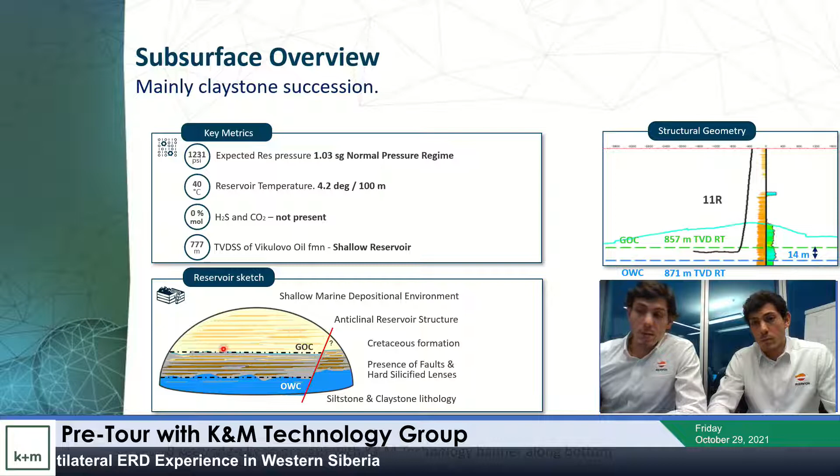On the bottom of the slide, it's good to share this simplistic sketch of the reservoir, which gives some understanding of the reasons behind designing such wells, the extended reach type. The reservoir particularity is having the oil contained in so-called sand lenses, which are distributed within the main claystone massive.

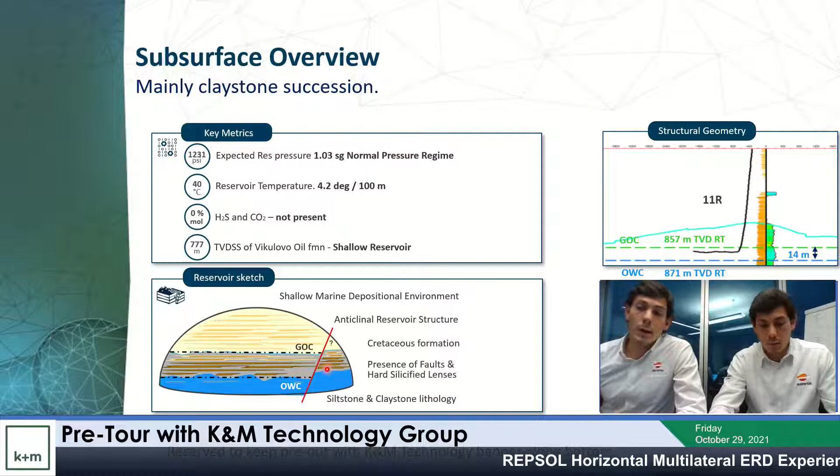That basically creates the main idea and objective of increasing reservoir exposure. We've approached that by drilling more meterage, having more horizontal interaction of the well, and increasing the drainage area.

Expanding more on the subsurface part, we share the geomechanical overview. Here we can see two basic features. On the left-hand side, the aerial view of stress distribution. The prevailing stress regime is a normal stress regime with a dominant vertical stress. For the horizontal stresses, we have negligible anisotropy, meaning our horizontal stresses are more or less equal in all directions. That's also specific to the geological environment.

On the right-hand side, we can see the wellbore stability plot. We have the equivalent mud weight plotted on the horizontal axis, and the vertical and measured depths plotted on the vertical axis. So here we're looking at the depth interval of the vertical parts of the well, and the highlight of this graph is how that claystone succession is prone to collapse and instability.

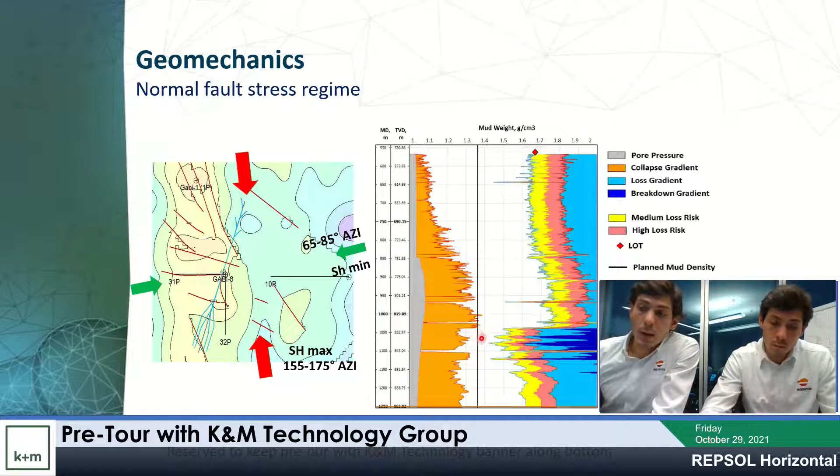And we have an appreciation, right? It all makes the drilling window quite narrow for operating, and in the tightest place we have just 1 ppg drilling window margin, which is quite interesting, and we'll share how we approached and dealt with that.

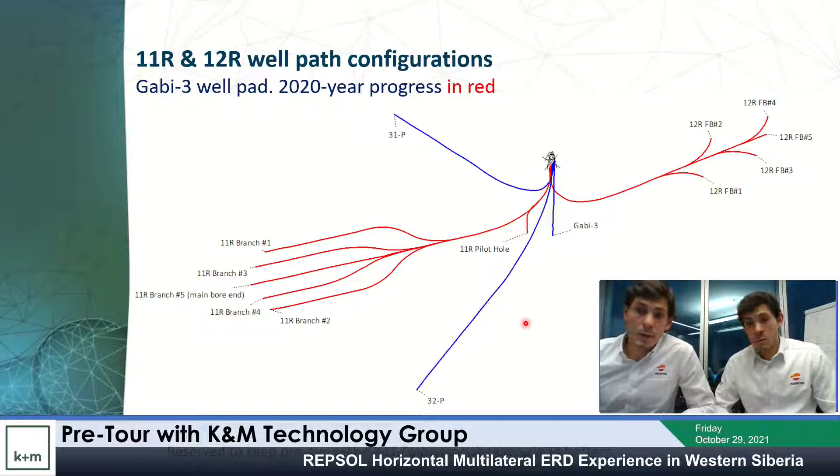Moving on to the next slide, we want to show you a good picture that gives you a well pad overview. These are highlighted in red, 2 wells drilled during the 2020 year campaign, by names 11R and 12R. 11R was the first one, and they're similar wells, but having different configuration of well trajectory in the horizontal plane, as we can see.

The 11R, having the more complex trajectory, has more reservoir exposure and more extended laterals, whereas the 12R, the second well, has less reservoir exposure. We'll look at the figures further on, it has more of a fishbone type configuration. They were both drilled in opposite directions, intentionally designed from the reservoir engineering perspective to test different patterns of reservoir performance, and also to avoid further well test interference.

Erik, I have a question, please.

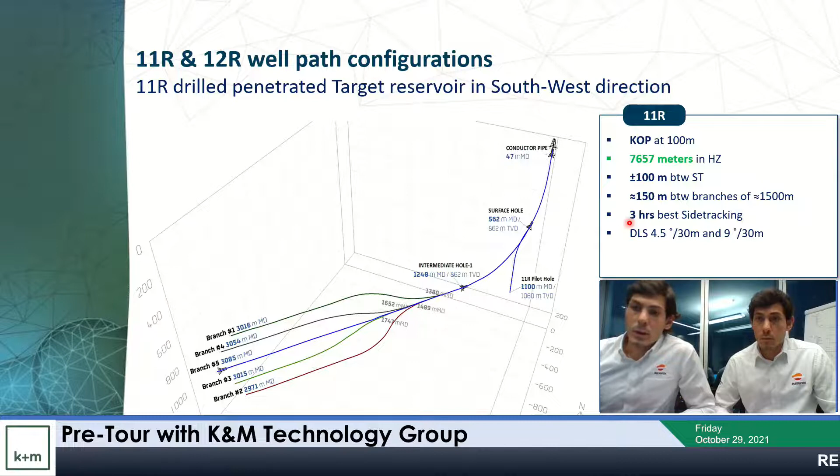Can you please elaborate a little bit more as to what was the logic behind the different length of those laterals, of those branches?

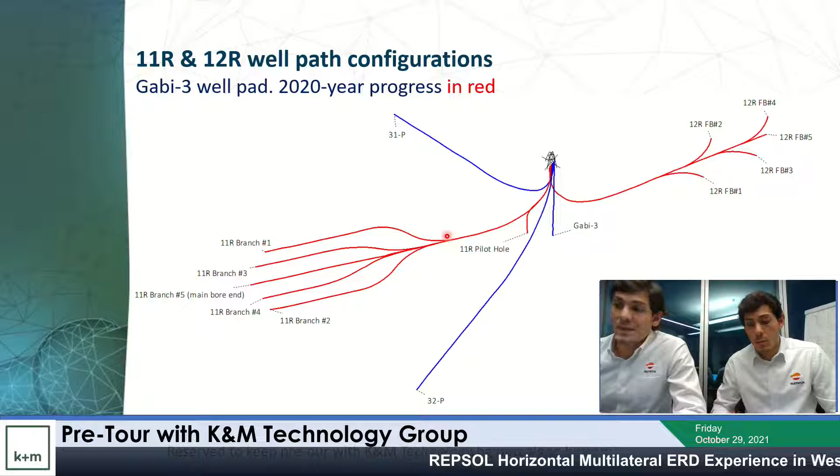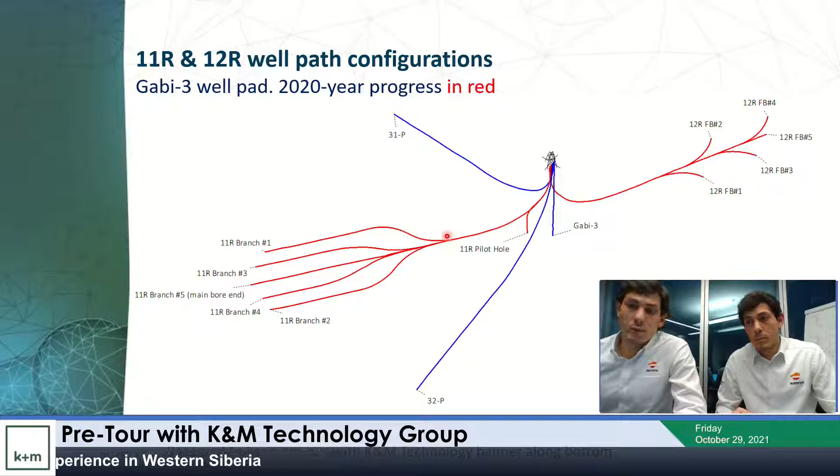Yes, of course. That's also coming from the project appraisal objectives. We were trying to estimate the reservoir potential, and we also wanted to understand which performance would be delivered by the different horizontal configurations of the wells. Reservoir properties are not equally distributed around the reservoir, and the main idea was to see and understand if increased reservoir exposure and horizontal meterage would really bring us any good benefit in terms of production output.

Yeah, if you would see any very beneficial and significant associated increase in production. And actually, it did.

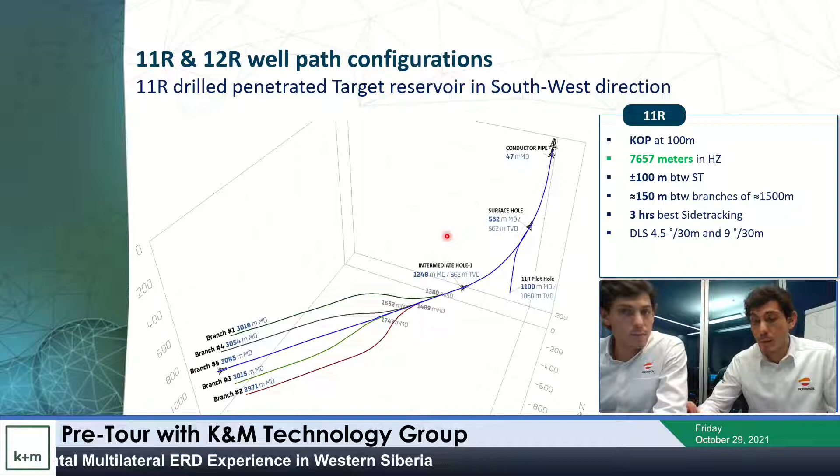We confirmed that the bigger reservoir exposure, the 11R well with the highest drainage area, was producing accordingly more than the 12R well - by a big order, even larger production output.

To give you more exact numbers of the reservoir exposure, here we have the key metrics presented in the slide. That's the 11R well, and it has achieved 7,657 meters of horizontal cumulative length of all the branches together. Also interesting to highlight here that the kickoff point is at a critical shallow depth of 100 meters.

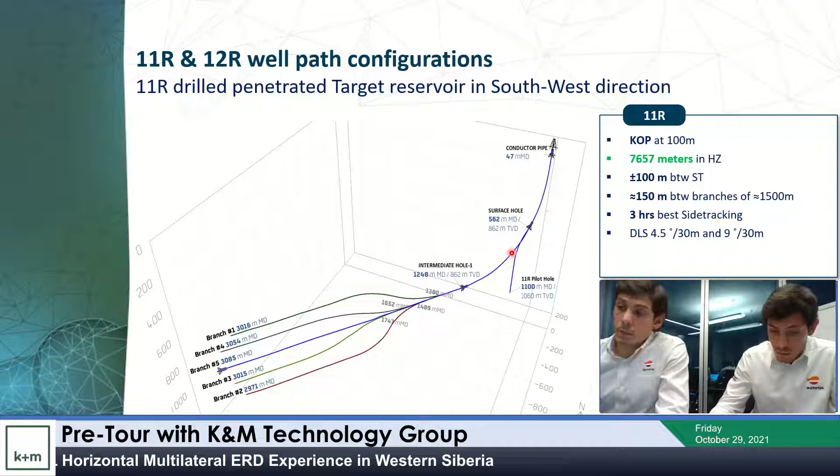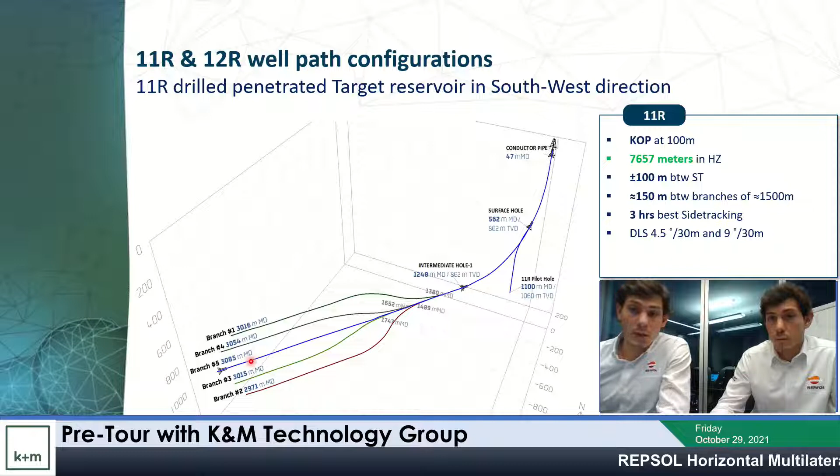Because we had to initiate the directional work as early as possible, following geological reasons. Another point to mention here is the sequence of branches. The configuration was executed by drilling branch number 1 first, and as you can see in the label order, finishing with branch number 5, which is effectively the main bore, and which was cased with a 4.5-inch liner screen, while all the rest of the branches remained open, not cased, not isolated. That was the completion strategy, which we will also touch on in more detail further on in the presentation.

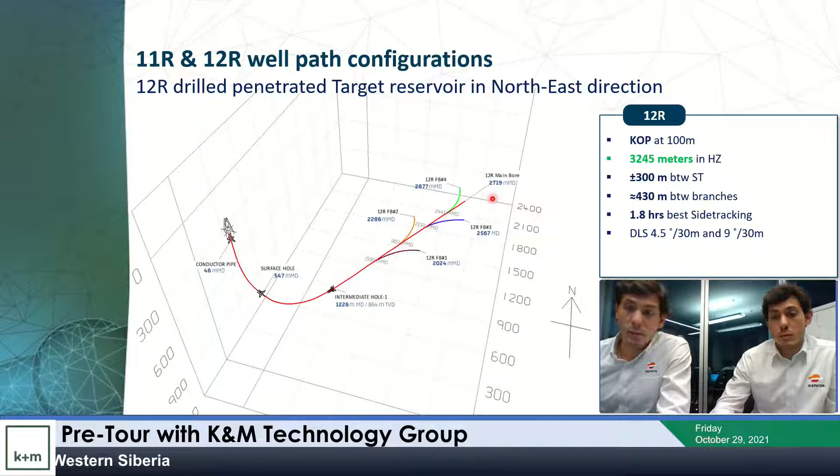On this note, just to show the second well trajectory - more of a fishbone type configuration, a simpler one, having just 3,245 meters in horizontal exposure. The distances between sidetrack points for each lateral are also bigger here. As Artur confirmed, that type of well did not prove to be the best case for the project, with having the largest exposure being the best solution.

Yeah. Can you please go back?

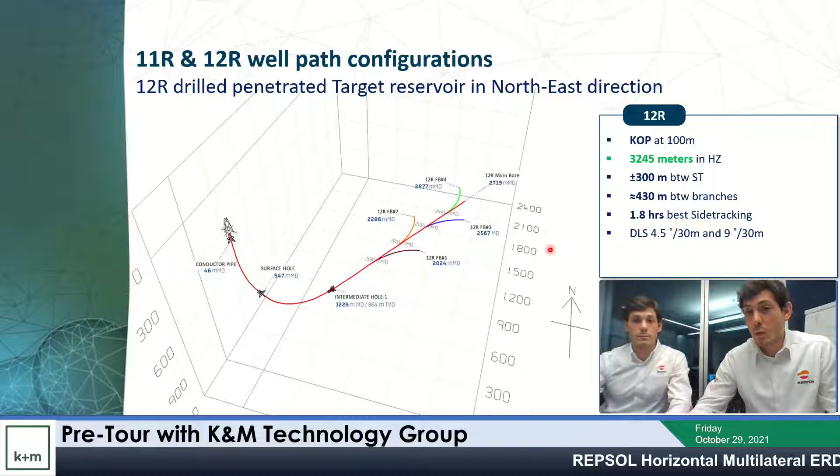Sure, another thing worth mentioning here is that both these two wells were built in two opposite directions. In terms of geomechanics, as was already mentioned, our horizontal stresses are more or less equal in their absolute magnitudes and values, and this was actually confirmed by drilling conditions - they were almost identical. So there is basically no matter in which direction you drill in our reservoirs, in our area, the drilling conditions are the same, and the behavior and all the problems associated are equal.

Moving on, it was also interesting during preparation of that presentation to give everyone an understanding, and basically the confirmation from our side, of where our wells fall in terms of categorization of that complexity of the trajectory.

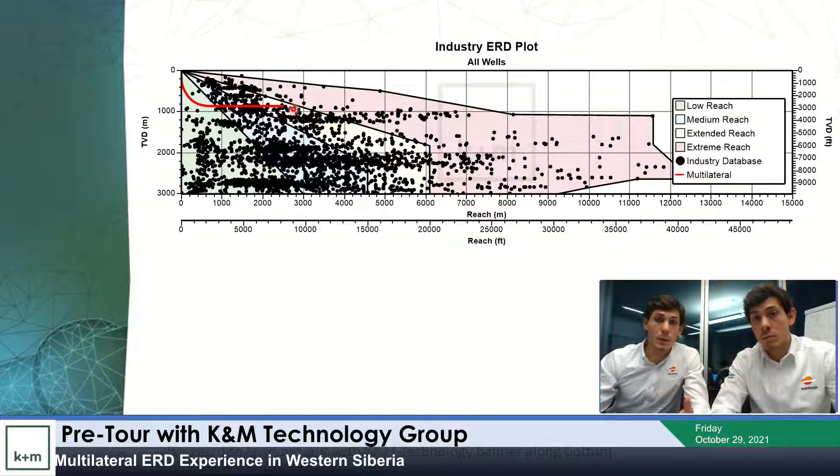And here we plot in red our wells over the industry-based benchmarking of all extended reach wells, also called the dog nose plot. And here we see, according to this categorization, that this type of well falls closely to the border between extended reach and even extreme reach categories.

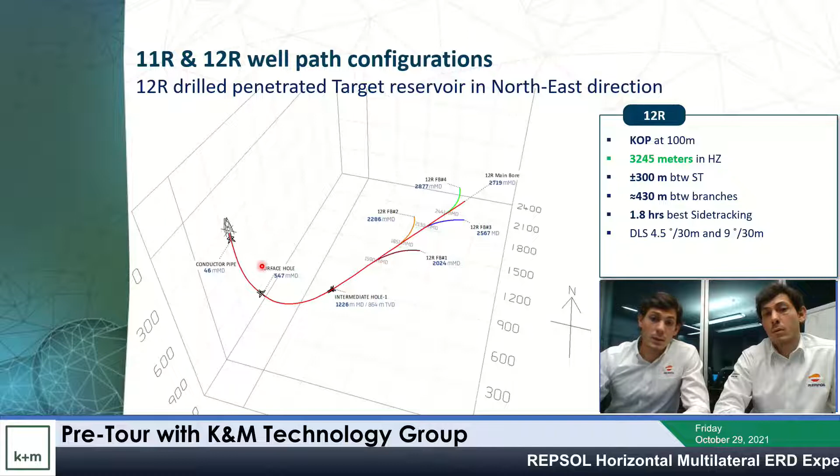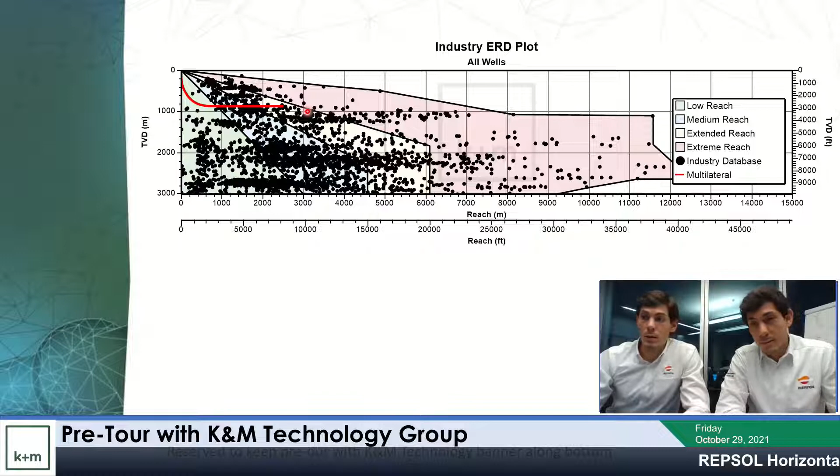From the previous pictures, it was not really - looking at that, it does look quite simple from the first glance. But when we look at the comparison between other extended reach wells, this shallow environment is exactly why it brings this whole complexity, making the project not standard, not simple, but quite interesting. It might look even more interesting if you sum up and take into consideration the whole reservoir footage that we drilled - 7,657 meters, which will basically place us even further on the spot.

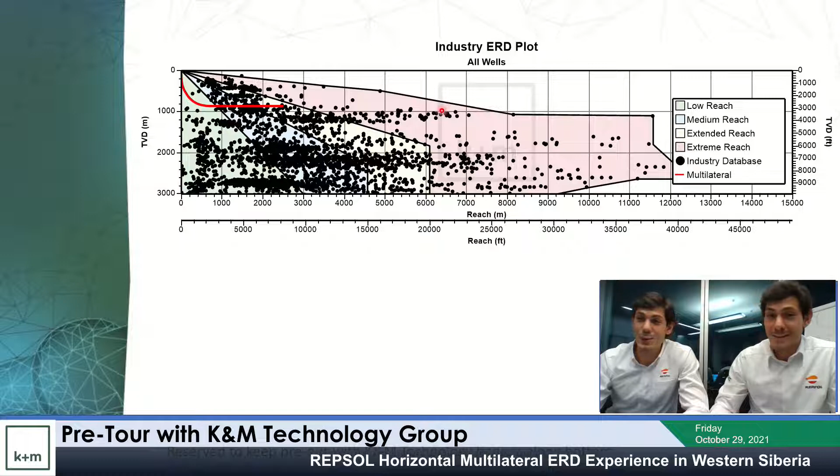Somewhere here, close to seven. If we count it like this, this would be looking like a record for this TVD. It might be, but here we just presented the main bore. If you're talking about summing up all the branches, it would look like a really extreme case. That's a good try, guys, but that's not how it works - try to beat all that performance. But it's still an interesting project that we want to move on sharing with you guys.

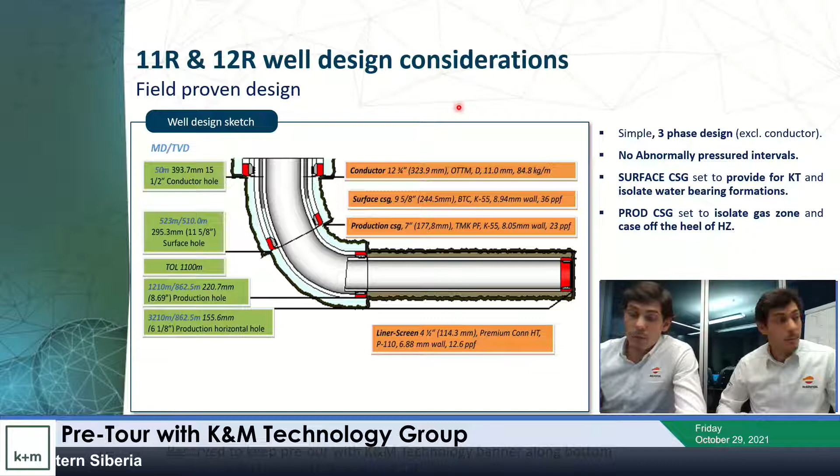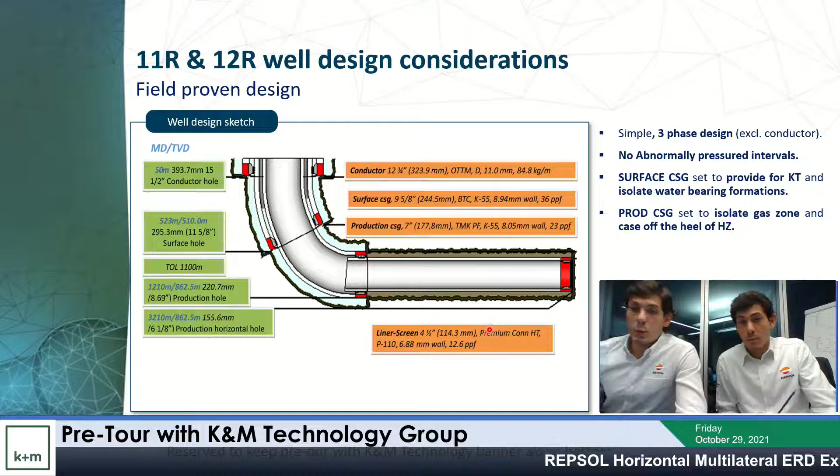And the next point to stop would be the well design. Just to quickly go through - from this side, there is nothing sophisticated. We're having the standard casing sizes and basically quite typical for West Siberia casing design configuration, which is a three-phase design, not counting conductor: 12.75, 9 5/8, and 7-inch casing sizes, and a 4.5-inch liner screen, which was installed in the main bore and located in the way where the screens were in front of the most productive potential intervals, so to say.

Right. At this point I'll hand the word to Artur to continue. Thanks, Erik. After this introduction, we'll go to engineering details.

The first topic will be hydraulics. We'd like to start with an issue, a challenge that we experienced at one of our offset wells drilled prior to this appraisal campaign. That was a horizontal well with a 2 kilometer length horizontal section, drilled with oil-based mud, the first such a long well in the field.

What we can see at the first plot, to the left, is the ECD plot on the vertical axis, showing length in TVD and measured depth, both in meters. At the main part of the plot we have our drilling window: wellbore collapse gradients to the left, static density in green line, and circulating densities in red line with the fluid loss gradient shown as the blue zone.

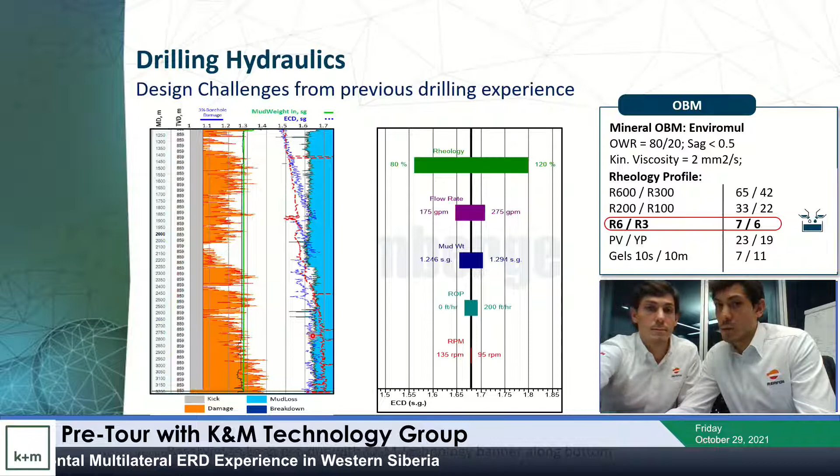The most important thing to mention is that the most typical issue for such shallow ERD horizontal wells is ECD management. We experienced exactly this issue, and in a hard way.

By the very end of the section, our static density was even less than the wellbore collapse gradient, so we experienced hole instabilities and cavings were observed at surface. Our ECD with pumps on was exceeding the fluid loss gradient, so we experienced seepage losses.

We were losing quite heavily the expensive oil-based mud, and the main driver and contributing factor to this issue was the rheology of the fluid, which gave us such a high ECD.

In order to tackle this, we could only implement additional drilling practices, additional back reamings and circulation cycles, which overall made our drilling progress inefficient and rather slow.

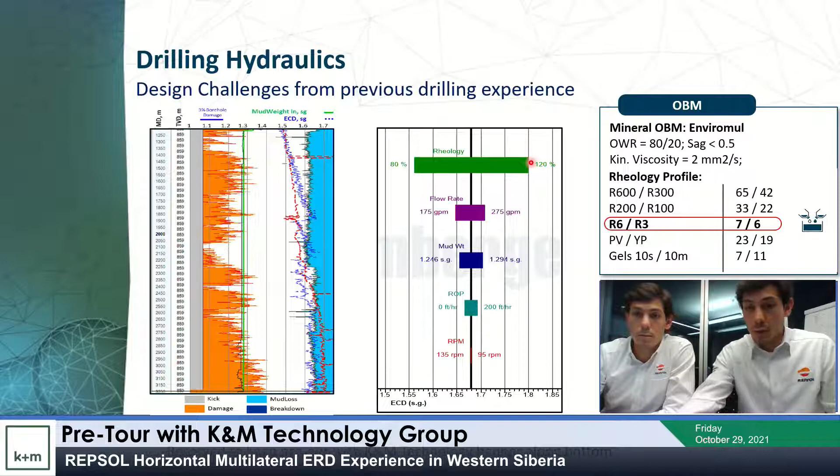Having understood this challenge and generally the issue of ECD management at the planning stage of these two appraisal wells, 11R and 12R, we targeted and approached this issue in the following way.

At this slide, we can see at the very beginning we designed a new fluid system, which was water-based versus the oil-based used previously.

Why water-based? Because with the water-based system we could reach the required much lower rheology numbers. The 6 and 3 RPM readings on the viscosimeter were both less than 1, which is very low numbers actually.

Just to support what you're talking about, Artur: the idea we came up with was a fluid with very thin rheology. Our basic idea was, why not try just water, specifically brine, and then see how it all started going from oil-based mud to water-based mud, trying back this concept but with significantly lower figures of low-end rheology.

Basically, that was a viscosified brine. And the first question that arose was how the formation would react with the water-based fluid.

In order to answer this, we ran a number of lab tests. The first was the immersion test, also called the inhibition test, where we left a piece of core from our reservoir in static aging at reservoir temperature for 1 month, which was the planned time to drill our horizontal section.

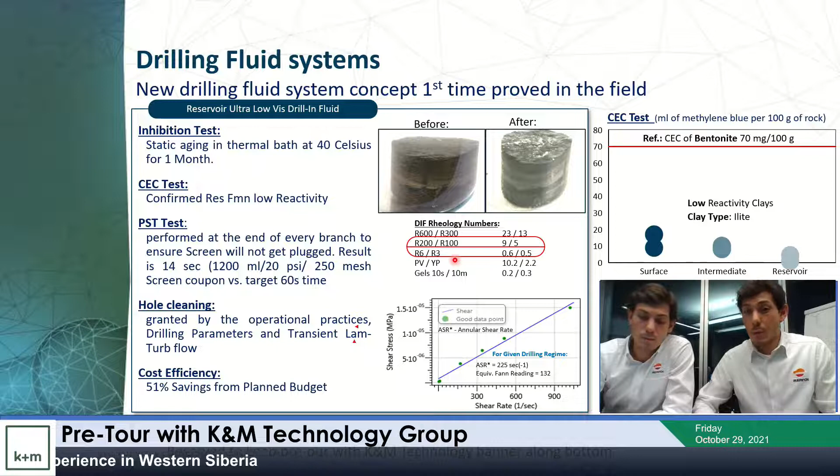In order to answer this, we ran a few hydraulic simulations in several software packages to double check, compare, and confirm results. We ended up with the observation that the flow regime in the annulus was turbulent, which with the given planned drilling parameters was sufficient to ensure and grant good hole cleaning conditions. This was a positive indication that made us confident that our wellbore is going to be cleaned sufficiently enough.

Next slide. I have a question, please. Yes, please, Olzhas.

What you showed just now was pretty impressive. The water-based brine, turbulent flow, perfect hole cleaning condition - it all looks great, and I wish it happens everywhere in the world. But my question is, those numbers are likely generated in lab tests, but very likely in reality you had cuttings dissolving in the mud anyways, and so the rheology must keep growing. How did you guys manage to sustain that low end rheology that would allow you to keep the flow in a turbulent regime? Because we all know that the moment you start adding a little bit of viscosity, you unfortunately lose that hole cleaning magic called turbulent flow.

Yeah, that's actually a very good one. Thanks, Olzhas. An important one to mention, at the very start of drilling the horizontal section with this type of fluid, we realized that we basically cannot control the fluid properties with mud conditioning and the solid control system. The only thing that helped us was dumping most of the mud coming out of the well, not the whole return mud, and introducing a fresh volume of mud into the circulation system.

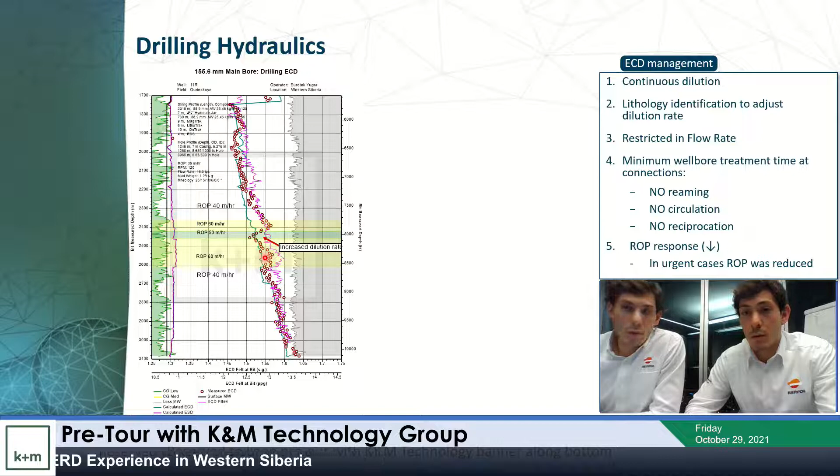And by having this fluid system in place and such ECD management practices, the overall drilling progress was much more efficient in comparison with previous wells and offset wells.

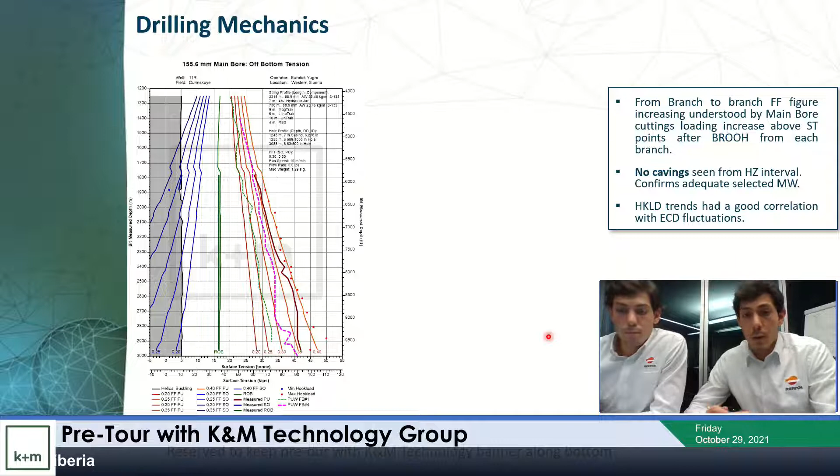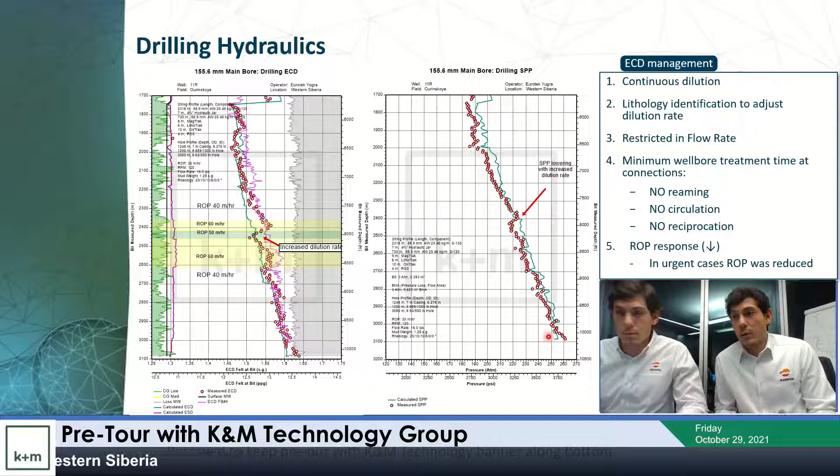It's about connection practice, that's right. So basically, we drilled every single stand down, spending time only for the surveys on every single stand, and for weight measurements every third stand, right? And monitoring closely the hole condition by our drag chart and hook load roadmap. Basically we did only the circulate bottoms-up cycles at the very end of every single branch and at the very end of the main bore.

Just to mention, at the end of each branch, the TD and the main bore, it was not like a circulating cycle. It was already very slow back reaming and at the same time cleaning up. So we always tried to make trip progress, which worked well. Basically what we wanted to avoid is redundant operations, which we achieved quite well right here.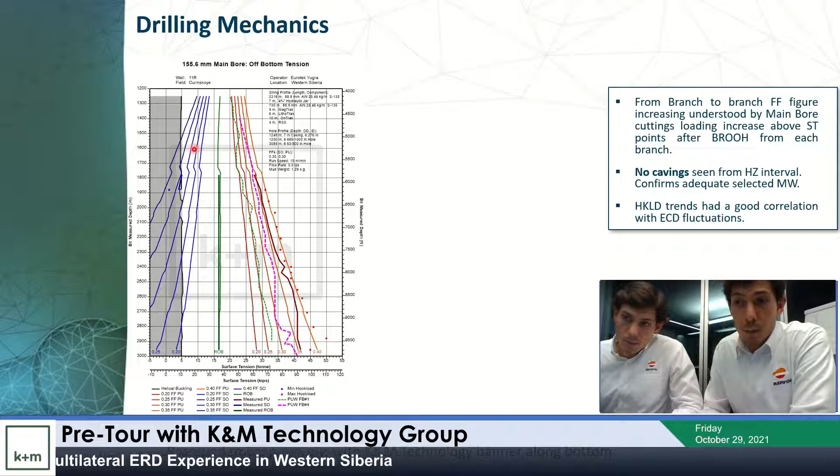We can also see here the actual data plotted for pickup weights. The dashed lines, the green one, pink one, represent the actual data from fishbone branch number 1, then basically every subsequent branch. What we can see here is also red dots - 4 of them for 4 branches. That's correct.

So as we're already here, I'll comment that we can see an increase in the weight numbers from branch to branch, and a steady trend within one branch. So what does it mean? It means an increase in friction factor and different wellbore conditions with further drilling of every single subsequent branch. How did we explain this for ourselves, and what was it actually?

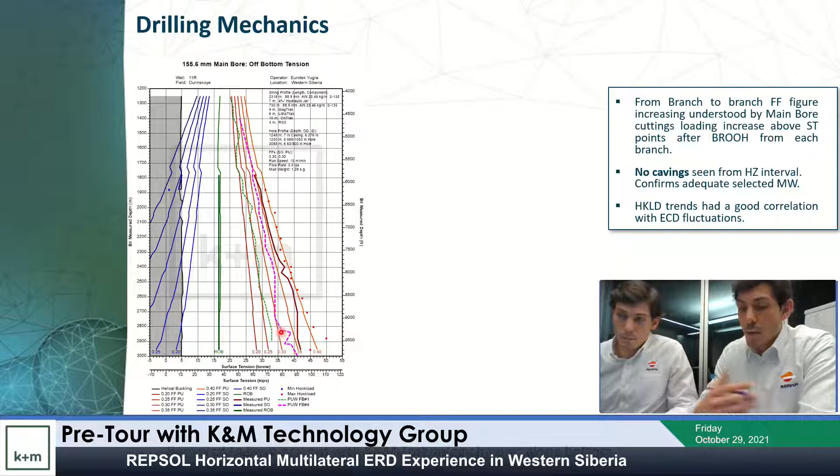Potentially, as we assume, there was an accumulation of cuttings with drilling progress from branch to branch in the upper part of the well, in the intermediate section, and further on from the back reaming process operation that we did when we tripped out from every single branch. Worth mentioning that the whole horizontal section was drilled in 2 runs.

We had to trip out just for top drive saver sub replacement and BOP pressure test reasons, just exceeding its running hours. There were no issues, the reason was just the accumulated running hours that required replacing this piece of element.

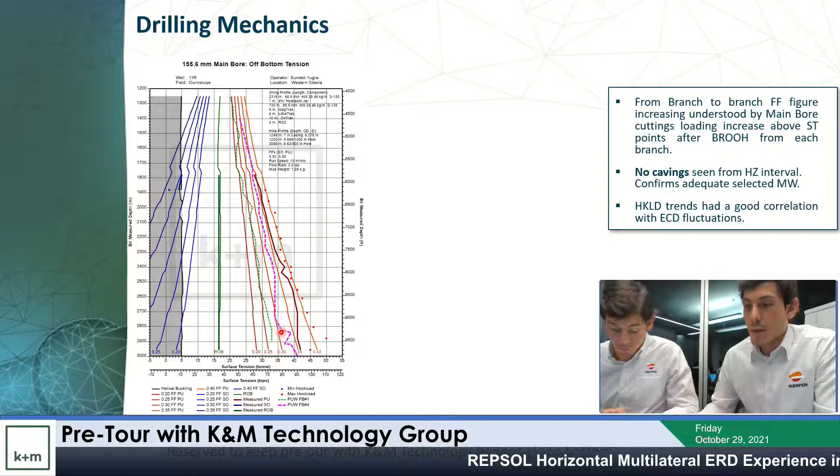But anyway, during back reaming we basically brought all the cuttings up within the wellbore and continued drilling with an already increased amount of cuttings and different hole conditions further on. That is how we can explain the increase of friction factor, pickup weight friction factor, from branch to branch.

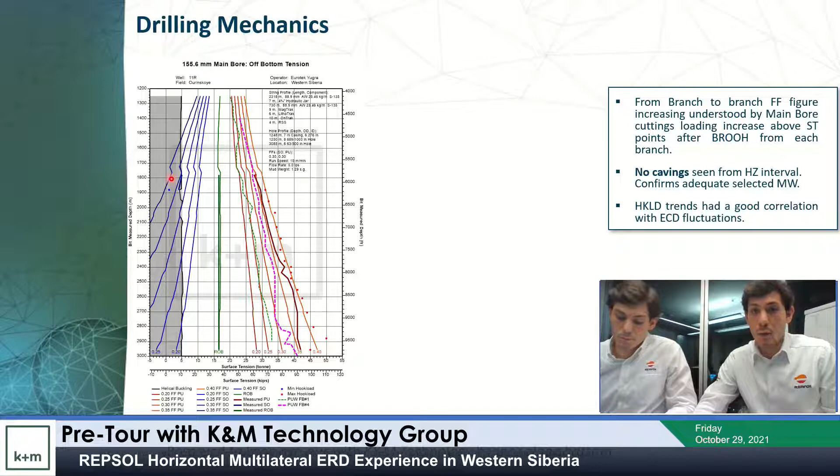Talking about slack-off weights, we see no actual data plotted here because almost no slack-off measurements were taken, since there was no slack-off tripping ability past the 2000.

Even here, at 1815 meter depth, there was already buckling happening with the drill pipe, so without rotation we could not trip in. That's correct.

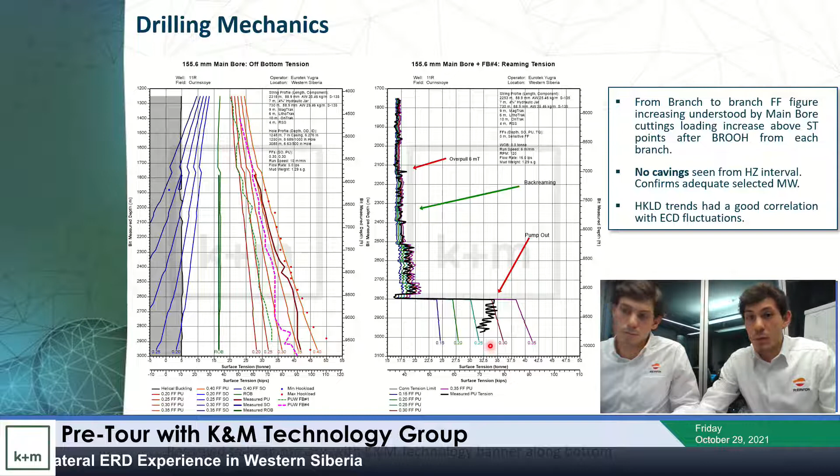Another thing to comment on is the tripping out operation that we executed from every single branch and from the main bore. Here we attempted 2 types of trip out operations. The first one was just a pump out. We can see the response of drilling parameters during the pump out - here we're looking at the hook load that was increasing against the expected and modeled trends.

The difference actually was not that significant. It was about, I would say, a few tons, right?

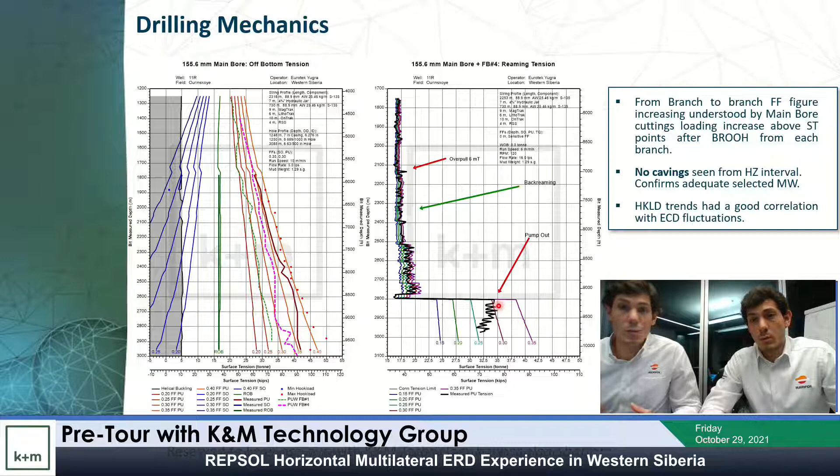So basically, what it told us is that we were dragging the cuttings by tripping out of the hole, and this warned us, so we were cautious in order to avoid making this situation even worse. What we did was initiate rotation to turn on this conveyor belt effect.

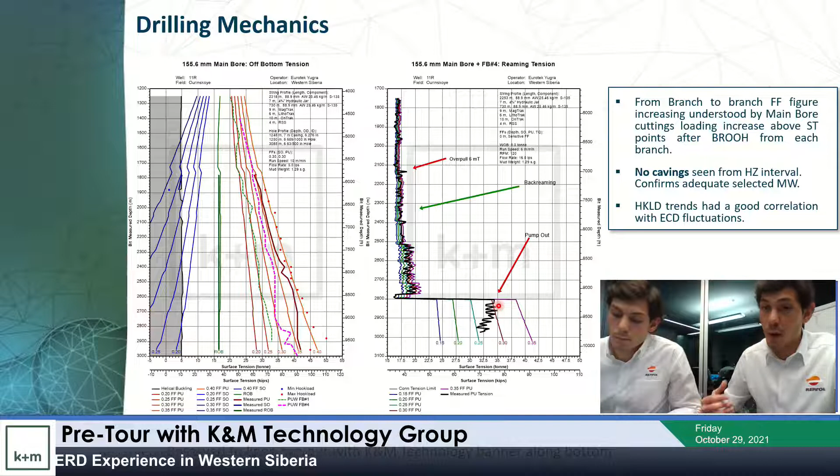To lift the cuttings in a more efficient and safe way up the wellbore. You can see that the hook load numbers with rotation decreased significantly, drastically, and matched the anticipated, model-calculated parameters.

Interesting to know how significant that was. Artur, yeah. One thing, please - we can hear you very well, Artur, but we can barely hear Erik. Erik has to move closer to the mic, probably. Okay, thanks for the comment, Olzhas. All right, yeah, just a little.

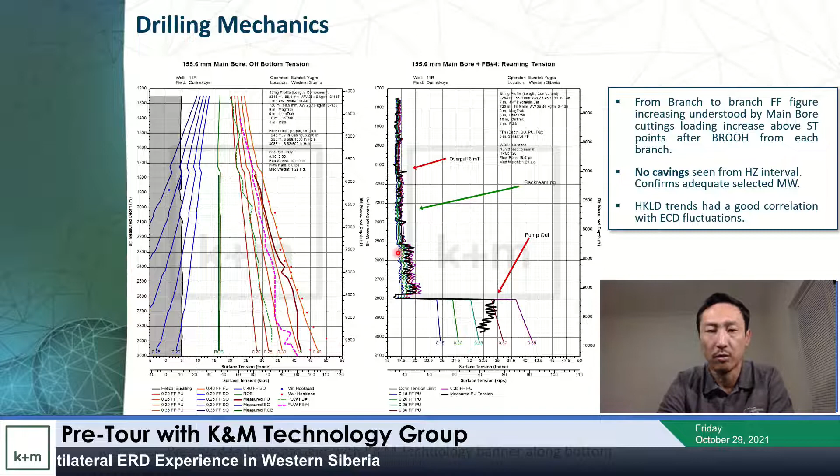Then the clarification I have regarding your tripping out procedure: when you said you were pumping out, were you pumping at full flow rate, or were you just lubricating out of the hole? And what was the reason to pump out rather than just trip out on elevators?

So during the pump out, we did not use the full drilling rate. That was about half of the drilling rate, I would say. And the main reason...

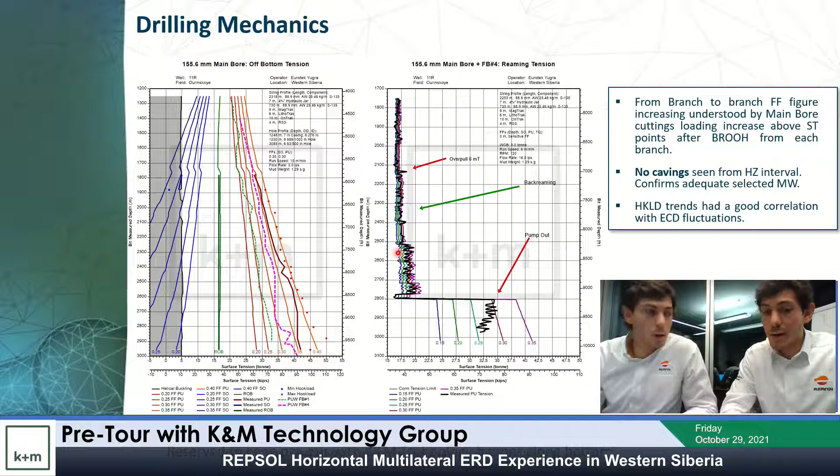...to pull out of the hole with circulation was the swabbing concern. In the open hole section, as we already observed in this drilling window, we had a very narrow margin, and every single movement of the string without circulation could induce swab-related wellbore instabilities and hole collapse. This was clear to us from the very beginning, and it was forbidden for the drilling crew to move the string without circulation in the well. So we could not afford this.

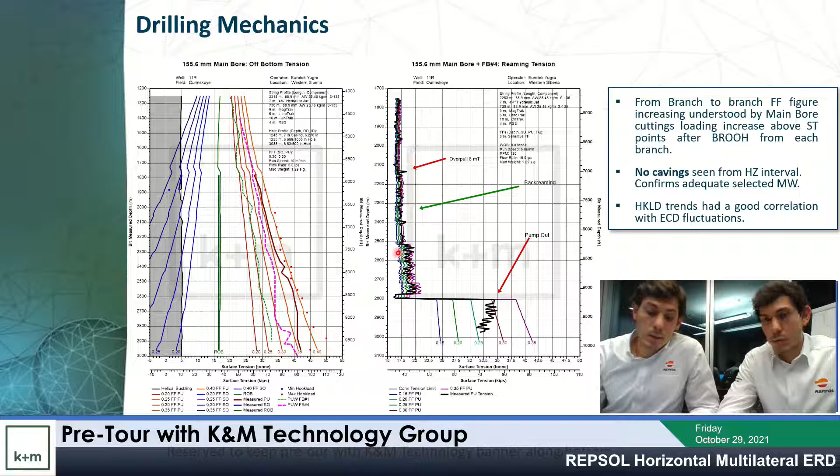On the side of choosing between back-reaming and pumping out of hole, it was just an operational decision - first of all, to be in the safe zone, and if any of the solutions works, to go for the fastest one. Pumping out of the hole seemed to us like it would be easier to control, and it seemed like an easier and safer operation.

But indeed it happened the other way around. We observed dangerous trends developing, a back-off type situation, and when we switched on rotation and proceeded with back-reaming, that went more efficiently, even quite faster and safer for us.

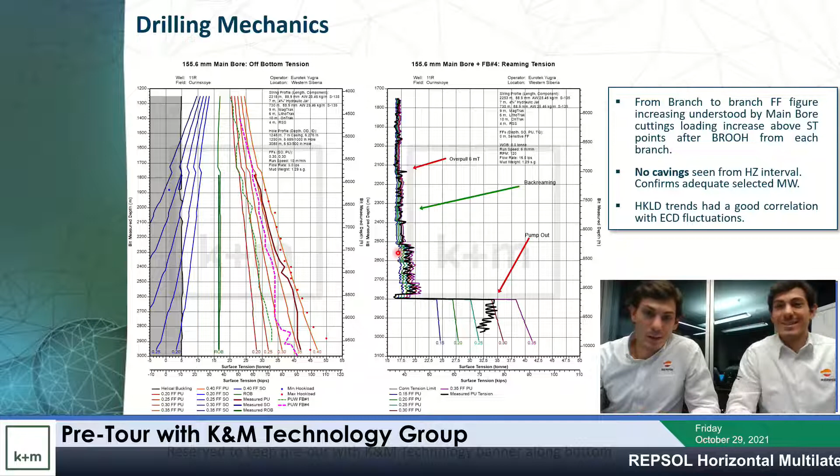...always having all eyes on the roadmaps, being prepared up front with the simulations - that's a very good one. If we did not have these numbers and curves to compare against and look at, we would never, I believe, have understood that we had this worsening situation developing in our well.

And if we were to continue pumping out of hole at the same flow rates and speeds, we would probably definitely end up with a back-off - end up with something bad.

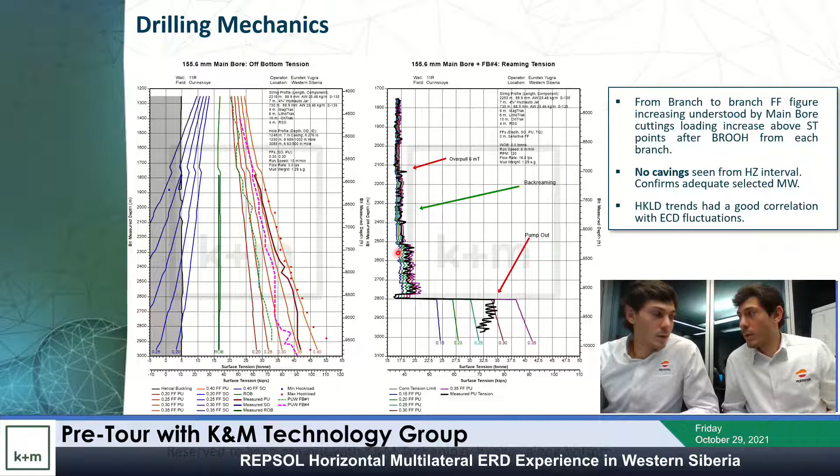But luckily we had a K&M engineer on site, and us as well - basically a few engineers day and night looking at those plots. All right, that's good.

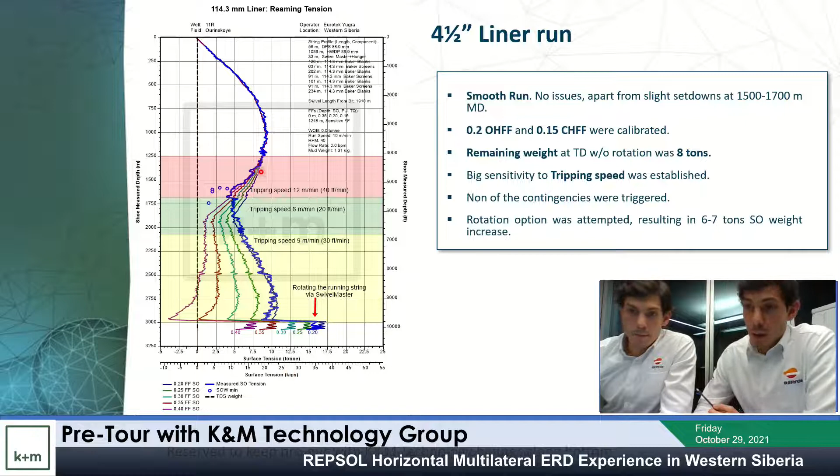This is the zero weight line, and the horizontal axis shows weight numbers in tons and in pounds/kilopounds. We observed at the planning stage that in the worst case scenario, at a 0.4 friction factor, if we had this condition in the well, we would not be able to reach our target depth with the liner. So we planned from the very beginning for two contingencies to have in place in case this situation happened, that we could rely on and implement.

The first solution was the deployment of the downhole swivel. That was one solution we wanted to test and perform field trials at these two appraisal wells with this tool. Another solution was in case we needed to rotate the whole string to have the high torque connections at our 4.5-inch liner in place.

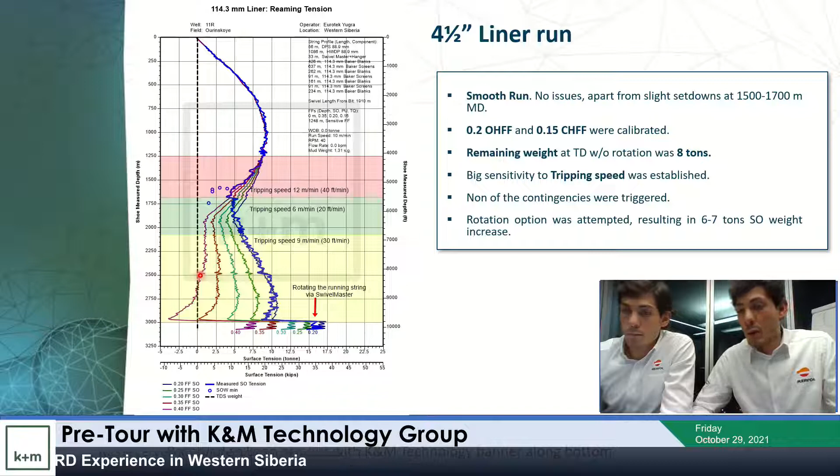So we had these two solutions, but luckily we didn't have to implement either to reach TD with the liner. We can see that the liner, the blue line, the actual data plotted against the model, followed the minimal friction factor, indicating favorable conditions, with the lowest open hole friction factor of 0.2 in our wellbore.

Out of curiosity, and as mentioned, to test and see how the downhole swivel works, we rotated the landing string itself and observed about a 6 to 7 ton slack-off weight increase, as noted here in the slide.

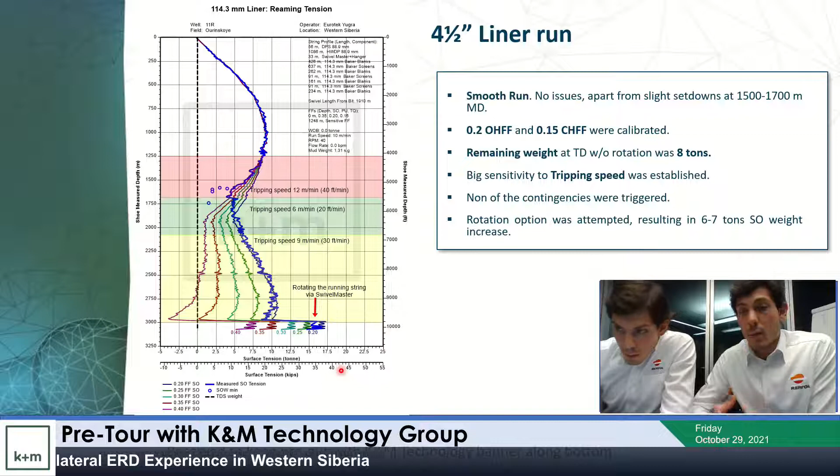During the run, when we started removing this axial drag in the upper part of the well, which is quite significant assuming the range of slack weights we were having, right, 7 tons, increasing by twice. So it's a great result, and it did allow us to gather this information.

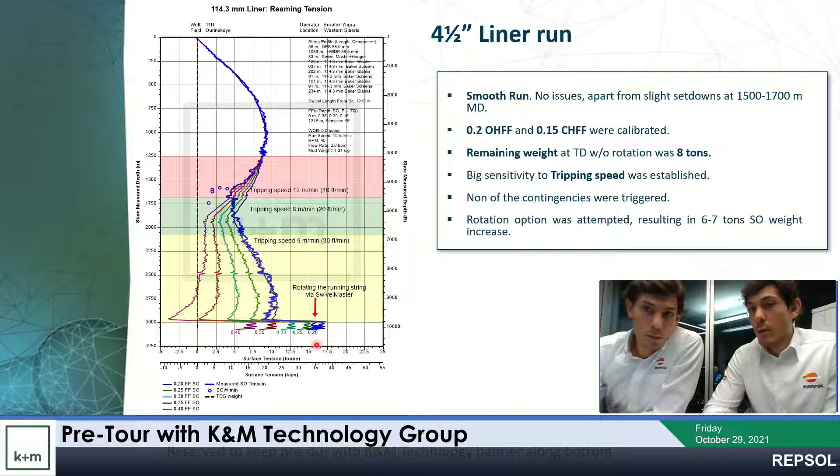We can say that in case of more difficult and tricky, complex trajectories for future development wells, should we need any contingency solutions, we can definitely rely on this downhole swivel, without any high torque connections.

Moving forward, a few words on the side tracking procedures and generally the kickoff point geometry of how we drilled our multilateral configurations. As already mentioned in the trajectories overview, the sequence of drilling our branches started from the side and went to the middle. The branches were drilled first, finishing the horizontal section with the main bore, which was finally cased with the liner. The liner and all the branches were left open.

So here we can see, in the horizontal plane, how the branches were deviating from each other, but the most interesting part is in the vertical plane. So what we can see here are the kickoff point geometries.

If we have a closer look at kickoff point number 1, there are basically 3 pieces, or parts, of the kickoff point. To make it clear for everyone, we're going to describe 3 different intervals of the branch. The very first branch was drilled with special planning of the well path to allow for successful side tracking of the subsequent one, a specific geometry, and these 3 intervals are the ones Artur is going to explain.

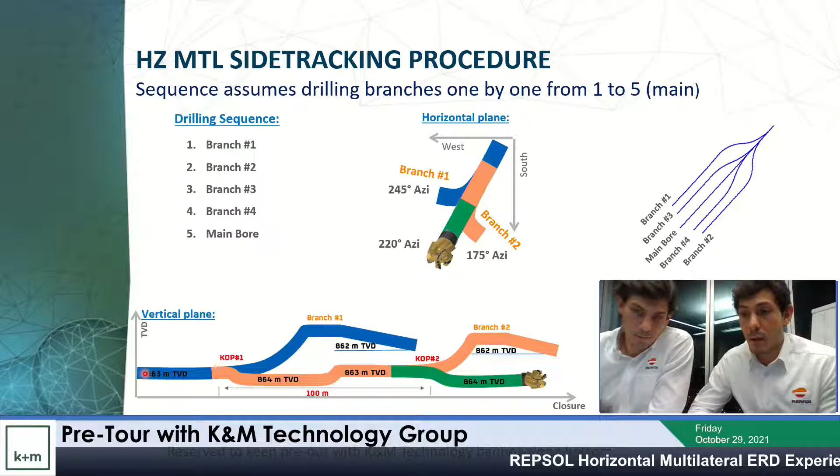The first one is a false groove, placed here. The false groove has an inclination 1-2 degrees lower than the branch itself. This is done specifically, and the length of the false groove equals the length of the BHA, to have the BHA lying a little bit down, so gravity force will work downwards when the next side tracking is done.

The next part of the kickoff point geometry is the ramp, or trampoline, which is just a sharp build interval of 6 degrees per 100 feet. Here we gain a few degrees in inclination. Let's say our horizontal section inclination is 90 degrees. The false groove will have 88 degrees inclination, and then with the ramp we gain up to 91 degrees inclination.

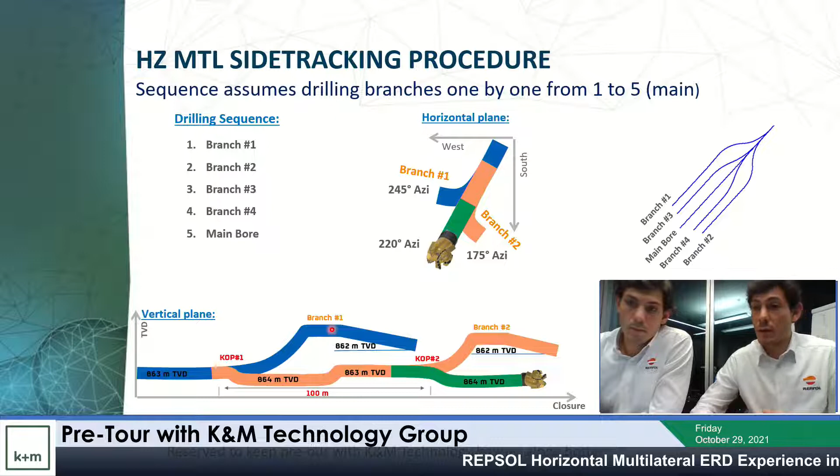This is done specifically for the further operation, when the BHA will be lying in the false groove, to work against the sharp build. The last element of the branch is a stabilization interval, where after the build we keep the inclination steady, and we can already work in a different azimuthal direction, as noted here.

So basically, after the stabilization interval, the real-time geosteering was taking place.

Once all the critical directional portion of the branch was completed, specifically the false groove, the ramp, and the stabilization interval, then geologists were switched on and helping us to geosteer in real time. Soon as the branch was drilled and backreamed up to their kickoff point, the BHA was positioned in the false groove and then started to work downwards, strictly downwards.

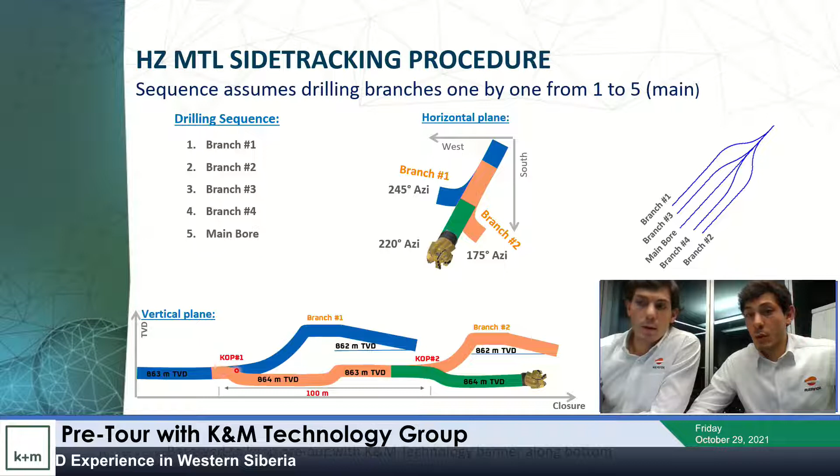I think we have visual pictures that we can show, right? That's correct, so basically 4 steps of side tracking. Here we can see the BHA in the false groove working, making a so-called ledge.

The ledge was made in the rotary steerable system in neutral mode, using just the gravity force and circulation and rotation, without any weight on the bit, meter by meter. The length of the ledge for this interledge building was about 3 meters.

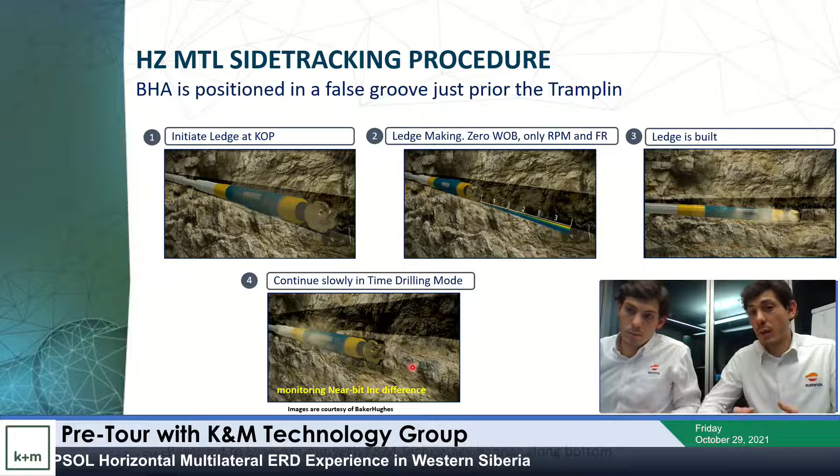As soon as there was sufficient phase of formation worked out and built, we started to observe some torque, and then we could apply some additional weight. After that, the time drilling mode took place, with steady parameters until the difference in inclination between the two wellbores was confirmed. When this was confirmed, the drilling parameters were increased, and we proceeded at full speed to drill the next branch.

Olzhas, any questions on this sidetracking operation here so far?

Well, it's very interesting what you're describing, and I was trying to draw this image, and then you showed the slide, and now it's cleared up. So the liner will always be seeking the low side of the hole, and this is where every other branch is drilled pretty much, always on the low side.

So that's the reason your liner will always be going into the wellbore that you want to complete. That's correct, that's absolutely right. I have a question: have you had any contingency plan? Say, for example, for one reason or another, the liner would end up going into the wrong branch. Was there any way that you would find out that it's in the wrong branch?

That's right. The first comment you made is that the liner, when it's run, will always follow the path of least resistance, going down under its own weight, under gravity. This was the idea behind drilling the main bore last.

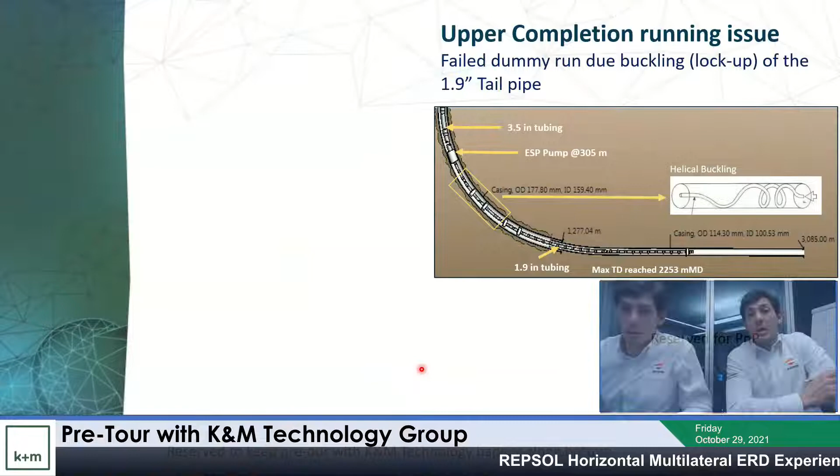Yeah, fair enough. So we go further. Another and the last part we'd like to cover, and a very interesting engineering moment, was related to upper completion installation, upper and intermediate completion. For our wells, this 11R well was tested, and the intermediate and upper completion string was represented by an ESP pump, that was run on, we can see here, right?

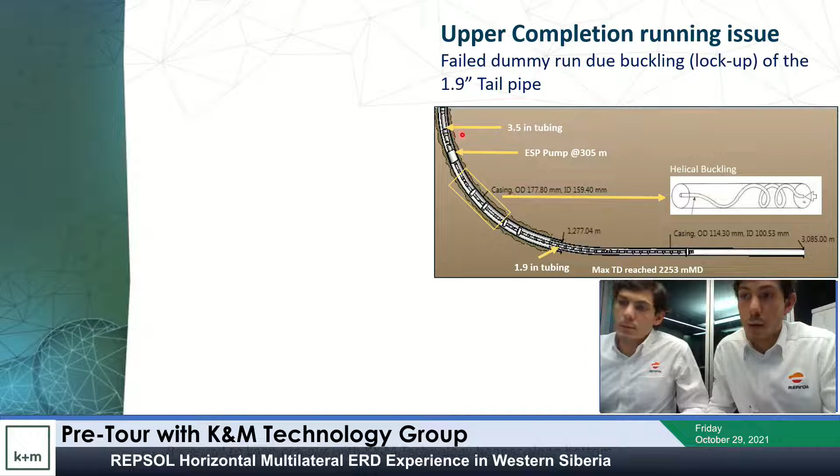The ESP pump was run on 3.5-inch tubing above, and it also had a tailpipe, 1.9-inch tubing below, that acted as a carrier of the DTS cable. DTS stands for Distributed Temperature Sensing, so basically sensing. We monitor temperature during production to assess the contribution of every single branch into the whole total well production.

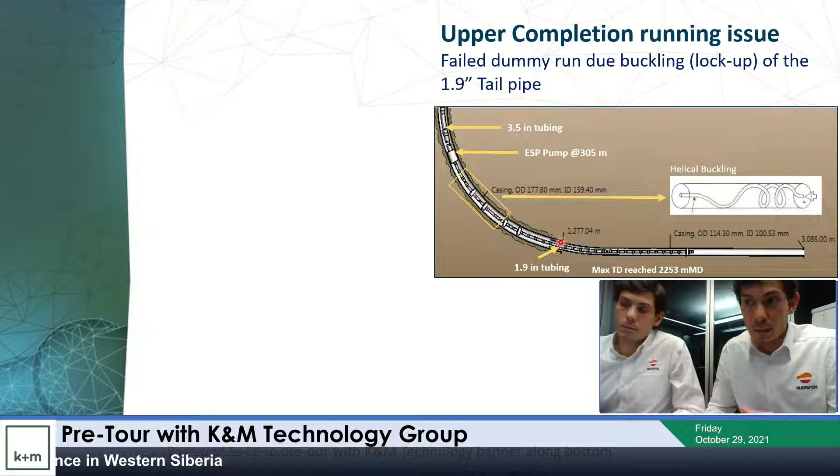This was the intermediate completion, everything below the ESP pump, this 1.9-inch tubing with the DTS cable. Also, there were 4 pressure gauges within this intermediate completion, and above, the upper completion part was represented by the ESP pump itself and 3.5-inch tubing.

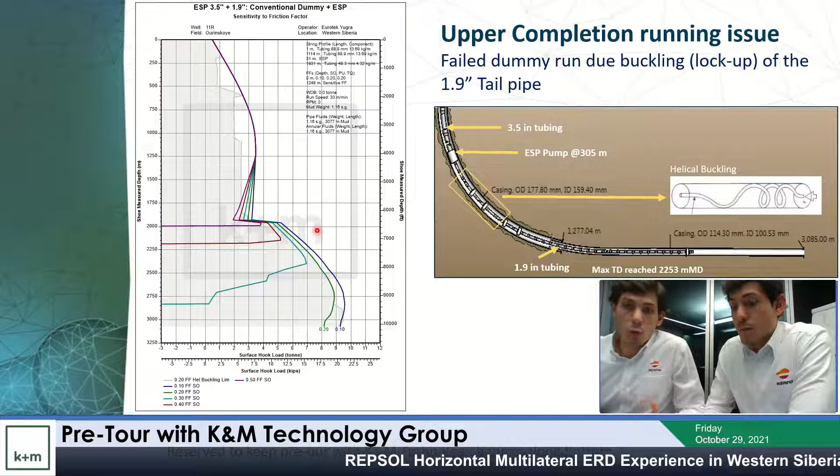At the planning stage, we observed a very interesting situation, worth mentioning, that this was the first time we planned such kind of completion, specifically in terms of torque and drag, and checking if that whole assembly would work. The main point is that at the planning stage there was no history data available that we could rely on, so we basically referred to the rule of thumb and typical industry numbers for cased hole friction factors.

So what we are looking at here is again the hook load roadmap for running this whole completion string. The vertical axis again is measured depth in meters and feet, and the horizontal axis is the weight numbers in tons and kilopounds.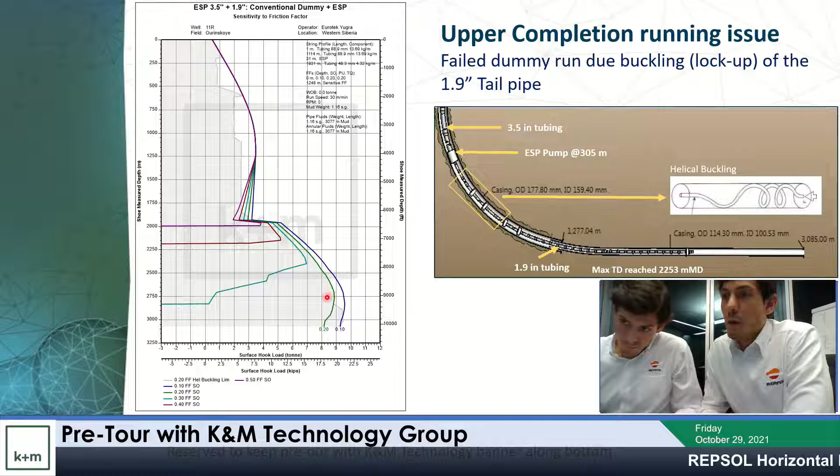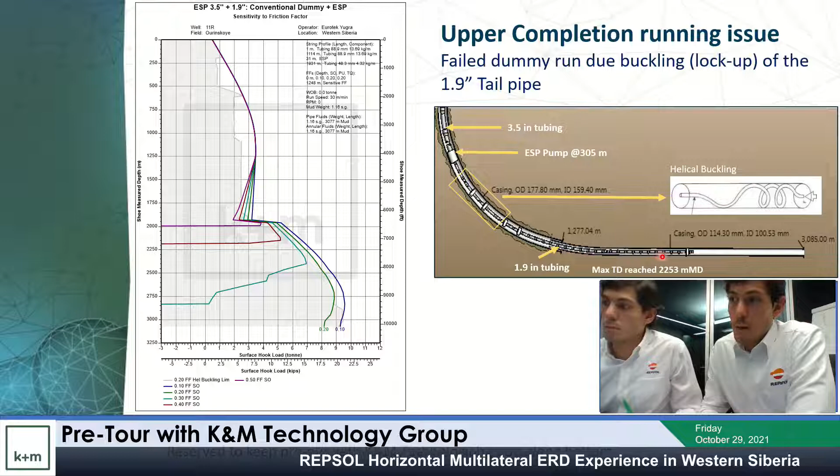Upper part represents a 7-inch casing, where we had a 0.2 fixed friction factor, and the lower part of the well is 4.5-inch liner, where we run the tailpipe. This part of the graph shows that at different numbers of 4.5-inch cased hole friction factor, we have different situations. We understood that we could install completion with a 0.2 friction factor in place, but in case the hole condition was worse and friction factor was higher, the tailpipe would lock up, and we could end up not reaching the completion string to target depth.

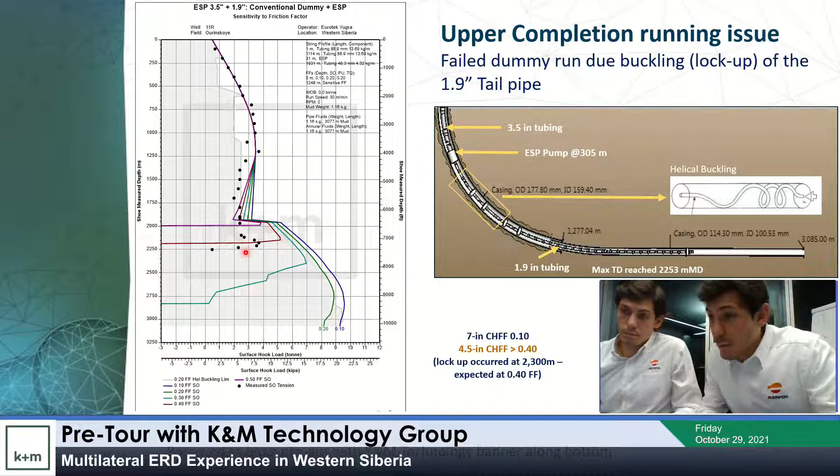That is why, having this understanding, we started our operations with a dummy run of this completion string, in order to assess and confirm the hole conditions. We realized the hole condition was as bad, and the friction factor was as high as 0.4. This is calibrated - the 7-inch hole friction factor was calibrated even at 0.1, and the 4.5-inch cased hole friction factor was calibrated at 0.4, with a tailpipe lockup happening in the 7-inch casing, where it has more space to buckle.

And the way we figured it out is really doing the SO analysis, trying to identify and understand what's going on during this dummy run, trying to find that solution. Basically we can see the issue in this simplistic schematic, how the tailpipe was buckling in the 7-inch casing during the run.

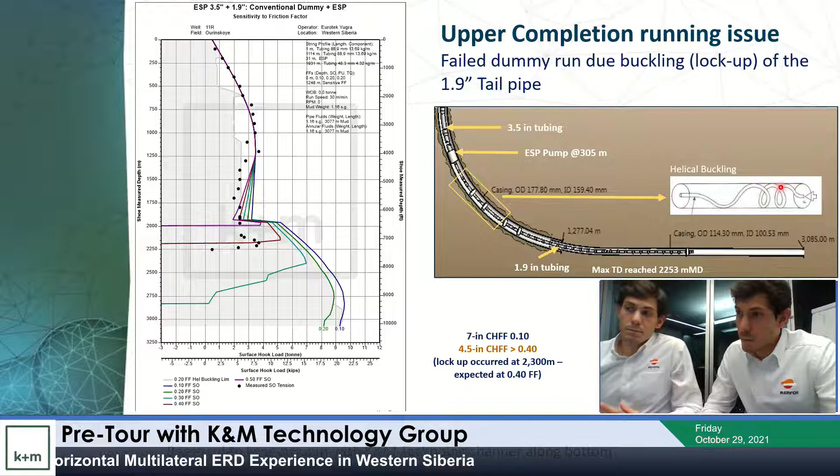Erik, for some reason we still cannot hear you very well. I'll try to talk closer to the microphone. Yes, please, yes. But please, just one question.

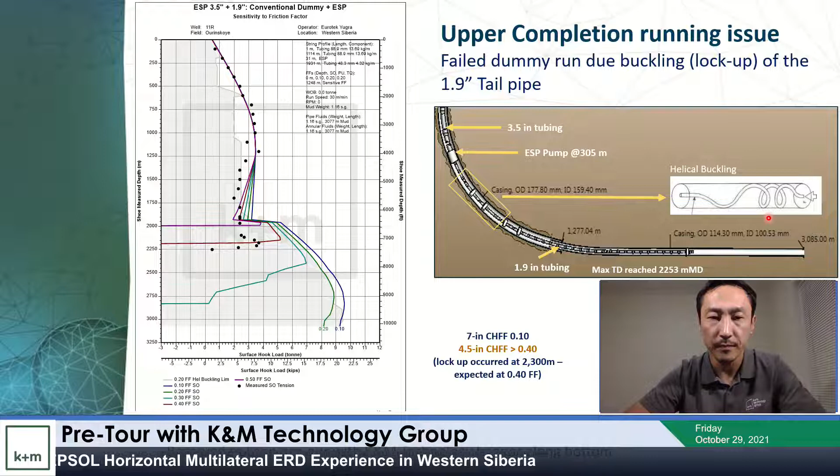So you guys ran this dummy run, and from what I'm seeing, your 7-inch cased hole friction factor followed a certain trend, and then once this tailpipe entered the 4.5-inch liner, all of a sudden those black dots started following a different trend, and then ultimately at 2250 or 2300, it seems like you ran out of weight. That's correct. I would say ran into the lockup condition. Yeah, that's correct. How would you explain this? I mean, this is a little bit confusing, right?

When you're running your pipe inside the cased hole, people would tend to believe that there's no cuttings, there is no wellbore instability. If there is wellbore instability in your casing, it must be some nasty wellbore instability. Actually, supposedly the hole must be in a great condition. So why wouldn't the pipe run into the hole? So in this case, what did you guys derive to? Like, what was the reason?

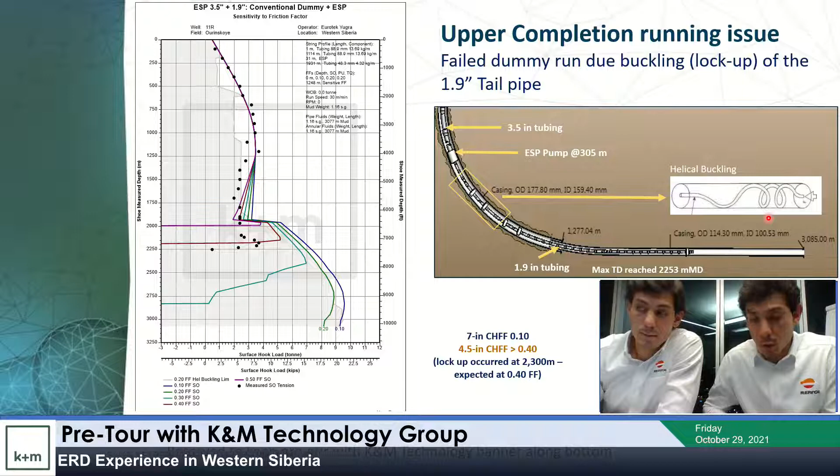Yeah, that was also our misunderstanding at the planning stage. We were hoping that the cased hole, even the 4.5-inch cased hole, would give us favorable and good hole condition and low friction factor. But indeed it appeared to be the tight clearance that was the reason of this issue - when the 1.9-inch tailpipe entered the 4.5-inch liner, it encountered much bigger and higher resistance, and within a few hundred meters we already ran out of weight, as you said, and entered into this tailpipe buckling, which locked up. Looking at this effective tension plot, the lockup occurred in the upper part right below the pump, but due to the resistance in the liner below, the lockup happened upper in the 7-inch casing. But the main reason, as we understand, was a tight clearance between the tailpipe and the 4.5-inch liner. That was the reason.

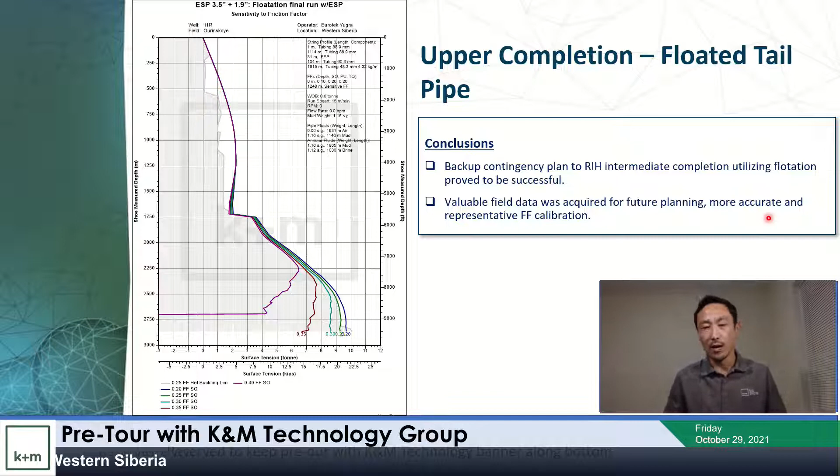Absolutely, this is basically - sorry to interrupt you, I just wanted to make this little note that you're absolutely right. There is some sort of misunderstanding or misconception where a lot of people believe that the friction environment in the cased hole should always be more slippery than in an open hole. But in this case, we can see that tight clearance actually drives your dynamic friction factors. The tighter the clearance, even if it's a cased hole, you may still run into the high friction environment, as high as 0.4, just like you showed us with the failed dummy run. So don't always assume that your cased hole friction factors are always lower than open hole. The different clearance environments would drive the numbers. Yeah, that was one of the biggest learnings for us from this project during the dummy run.

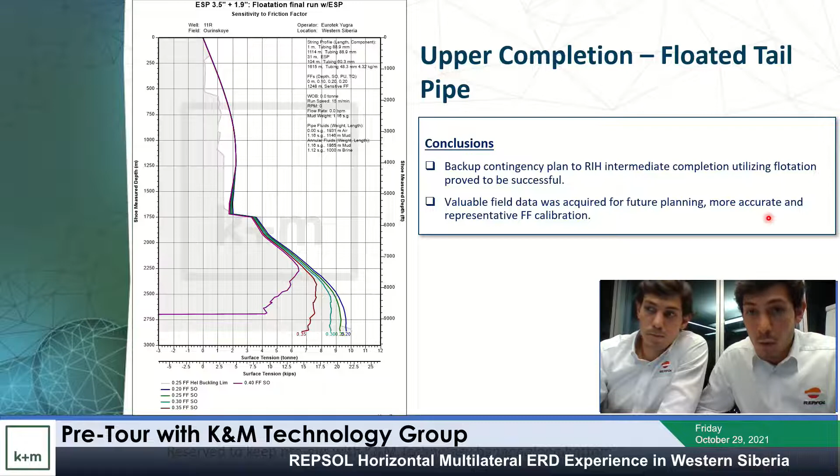Yeah, that was the first dummy run when we confirmed our worst case scenario, and then we had a backup contingency plan in place for how we basically get out of the situation. We planned for a flotation option of the tailpipe in order to gain some weight.

So what we did, we entrapped air inside the tailpipe as soon as it was acting solely only at the carrier of the opto fiber cable and the pressure gauges. Then we did not need to use its internal area ID for any circulations, just a carrier. So we isolated and basically sealed the air inside.

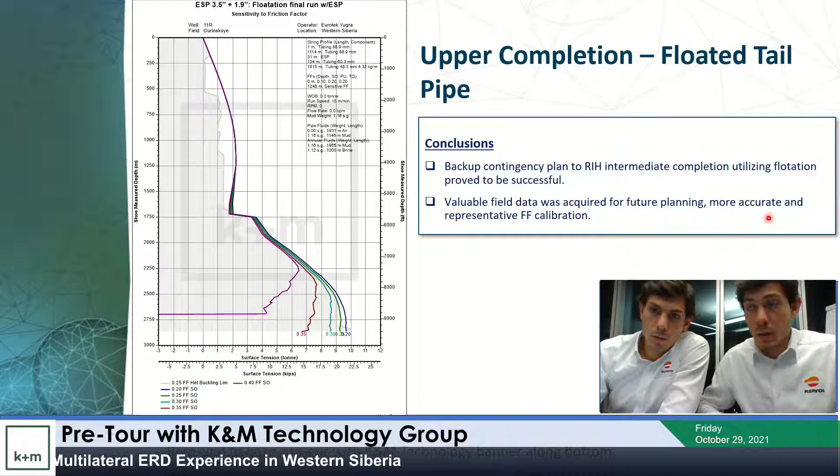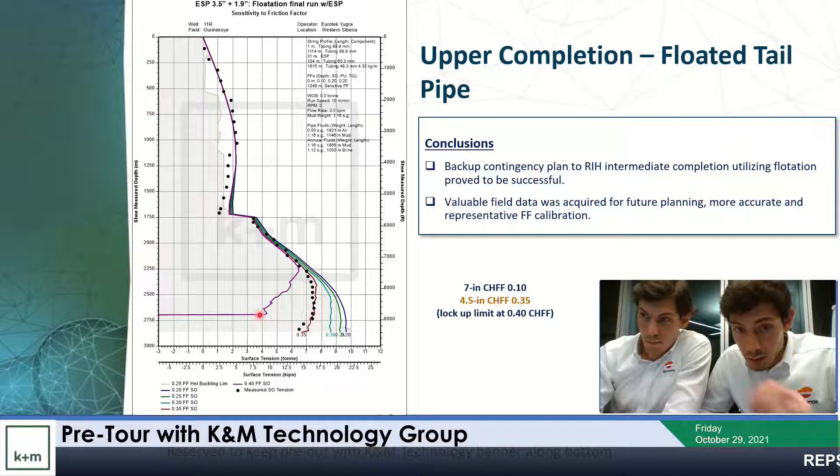Right, and it worked well indeed, and helped us to deliver. As we can see, the actual data were plotted here, already different model for the case with flotation, and the actual data followed the 0.35 friction factor in 4.5-inch case hole, and same matched before 0.1 friction factor in 7-inch casing. So this is how we basically managed to solve our issue with the tailpipe buckling and lockup, and that was a successful second final run.

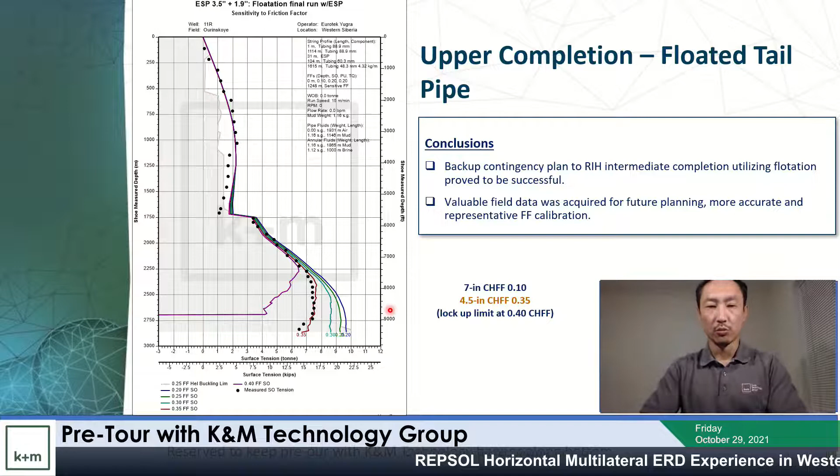Yeah, this is very interesting, guys. So just to summarize what you just said, you run the tailpipe, 1.9-inch tailpipe, you run it empty, you pretty much floated it, and then the tubing and the top part actually mud filled, right? That's correct, absolutely. The upper tubing above ESP, 3.5-inch tubing, was mud filled as conventional, and the only the pipe below was floated with air.

Interesting, you guys replicated the casing flotation, but using the tubing in a simple way. Yeah, perfect, no, that's pretty smart. No, yeah, we just copied some best practices and tried to make the best out of it in the circumstances we had.

Yeah, I would say that this is everything what we wanted to share with the community today. Thanks everyone for attention and for questions.

Olzhas, I don't know if we have any other questions anywhere in the chats. Let me check the chat if we have any questions. I have the chat up running so far. There are no questions, people just sending some nice comments to you guys.